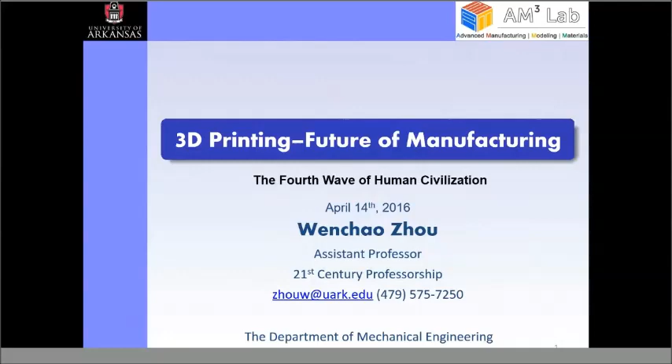So we humans have a very humble beginning, and we started from a nomadic lifestyle. We don't have any stable food source. We don't have a fixed residence. We have to hunt for food. We have to move around. And then about a few thousand years ago, we have the first wave of technology revolution, which was agriculture. And it gives us a stable food source, so that we can live at a fixed residence, so that we don't have to be nomadic anymore.

And then comes the second wave of technology revolution, about 300 years ago, the industrial revolution. Previously, we still had to use our own labor to produce, to feed ourselves. But after the industrial revolution, we have been able to use machines to do all these things for us, which freed us from labor. But there's one catch, which was that there was very little individuality. Everything had to be mass-produced, and it was produced in factories, and it was very capital-intensive. It pretty much gets out of the hands of individual human beings.

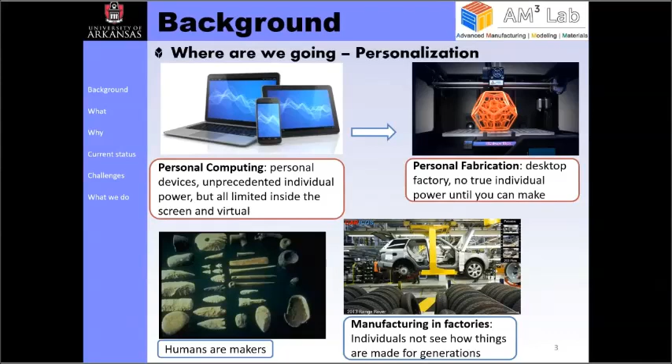So this brings up the next change that we want to make, which we can make an analogy to personal computing, which we call personal fabrication. So in this age, we envision that we're going to have factories sitting on our desk, and we can basically make anything that we can design from a computer screen. And in this way, we can truly get the individual power we want. Because we won't have any individual power unless we can make. We can really make things happen and get into the physical reality side of it.

So how do we go about personal fabrication? My answer is that it actually resides in an ancient technology called printing. And we're very familiar with printing. It was invented about 2,000 years ago in China, the woodblock printing method, which is actually the original technology that brings knowledge to the market. Afterwards, we invented movable type, and in 1951, we had the first digital printing technology, inkjet. And in 1984, we extended to one more dimension. We got a 3D printer.

Many people probably don't know printing is actually a very big industry. It's actually the biggest industry in the world. It outshines the music industry, the automotive industry, with an annual GDP of about $640 billion. And we print about 45 trillion pages every year. So if we can extend this printing to 3D, imagine what we can do if we can print 45 trillion objects every year. That would be truly the age of personal fabrication.

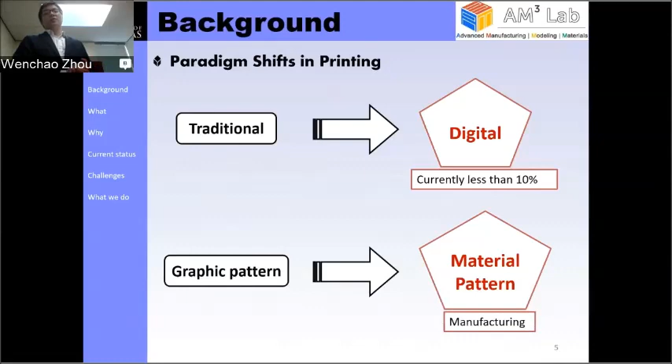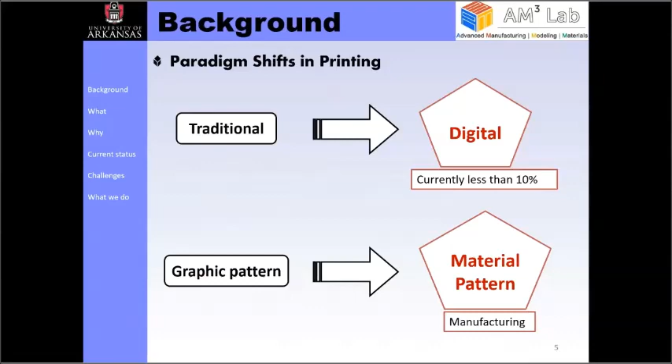So the second paradigm shift is to go from graphic patterning to material patterning, which is basically manufacturing, because manufacturing is how we pattern materials into different shapes and functionalities. So these two paradigm shifts will help us to get into the age of personal fabrication.

So what's the motivation for this paradigm shift? First of all, digital is great. Digital is what every business wants because it's on demand. It has zero waste. You don't have to stock anything. It's decentralized. You can distribute it anywhere in the world, and it's easy to store. It's green. It's easy to distribute. Easy to use. It's clean, and it has very fast turnaround.

Because one of the things that business hates is uncertainty, and digitalization can help us get rid of these uncertainties by streamlining the processes. So for material patterning, if we can digitalize information, wouldn't it be better if we actually have a digitalized world? If we can actually have a digitalized object, and 3D printing can hopefully become a tool for it. And it gives us cheaper, faster, and better products.

So this is the evolution that I see. We have the mass production from the Industrial Revolution. And we have another digital revolution which brings us the customization of information. We can customize the information you send and you receive. And if we can make the digital patterning work, the digital fabrication work, we're going to have a digital industrial revolution, which is going to give us mass customization, which means everybody is going to get customized parts at a cost that's no more than what we're currently paying.

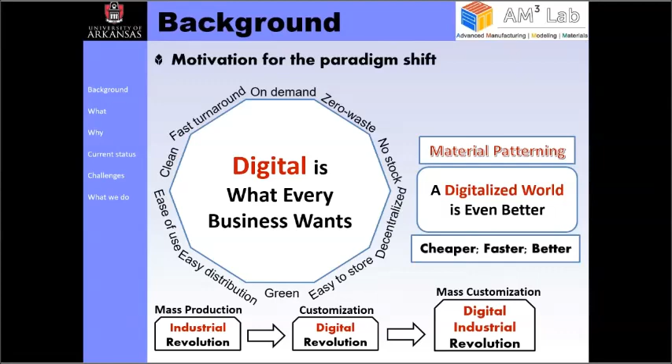So this is a map for the manufacturing technologies that we have developed over history. On the x-axis here is the relative accuracy. The y-axis is the object size. As we can see, for very large objects, we're still relying on traditional machining for manufacturing. For very small objects like the CPU you're using, or the sensors in your cell phone, all these small devices, we have invented the MEMS and NEMS technology to fabricate those.

And where additive manufacturing stands is actually in the center. It's mostly for micro and meso scale manufacturing. It's very difficult to fabricate very large objects with additive manufacturing, and it's also very difficult to fabricate very small stuff with additive manufacturing.

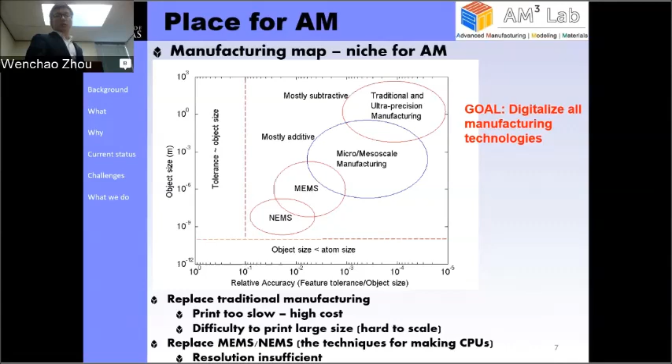So if we truly want personal fabrication, one of the first things that we need to overcome is, can we actually digitalize all these manufacturing technologies, and make it at a cost efficiency that's comparable to traditional manufacturing? Otherwise, it's going to be hard for people to accept it because of the high cost. So one of the difficulties for replacing traditional manufacturing is that all of the 3D printers right now are too slow. And we know time means money. Manufacturing time is what determines its final cost.

So that means if you want to mass produce some products with additive manufacturing, it's going to have very high cost. And it's very difficult to print very large sizes because additive manufacturing technology is very hard to scale. And if we want to replace MEMS or NEMS techniques for making CPUs, we will not only need to make them fast, we also need to improve the resolution as well. We want to get into the nanoscale.

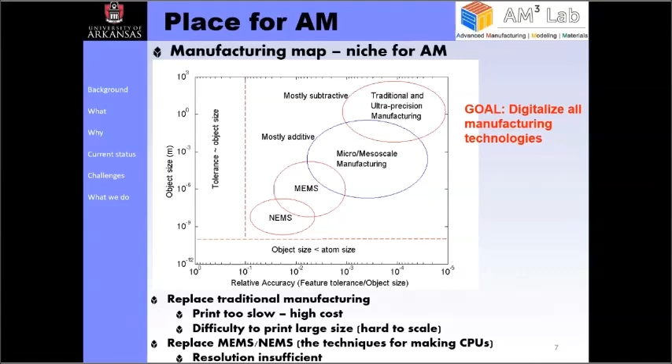So we have all these challenges that stand in the way for us to get to the age of personal fabrication. So this is why we founded the AM3 Lab at the University of Arkansas. Our primary mission here is to develop ultra-fast 3D printers so that we can decrease the manufacturing cost by increasing the printing speed. We want to be able to reduce the printing time from currently hours to minutes or even seconds, and make this fast enough so that it can compete with traditional manufacturing for mass production in terms of cost efficiency.

So the second mission of this lab is that we also want to promote the use of additive manufacturing by exploring some cutting-edge applications. We're developing some new applications on 4D printing. We're also working on some new 3D printable materials. So I'm going to briefly go over these different projects that are ongoing in our lab. Hopefully, it can inspire you to come up with similar ideas and to contribute to make personal fabrication happen in a short time.

So one of the projects that's ongoing is the inkjet printing technology. As many of you probably know, you probably own an inkjet printer on your desktop for 2D printing. And it can also be used as a very elegant 3D printing technology because it has a wide choice of materials and it's very easy to scale. It's digitally controlled. It has very fast and low cost operation. And it naturally integrates multiple materials, just like you're printing multiple colors. And it's clean. So there are two most common inkjet techniques. We call one drop on demand because you can produce a droplet anytime you want on demand.

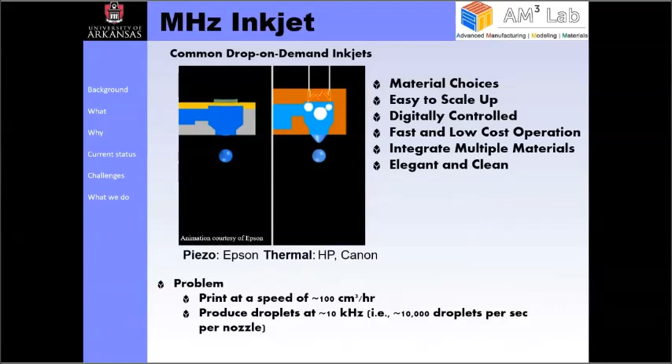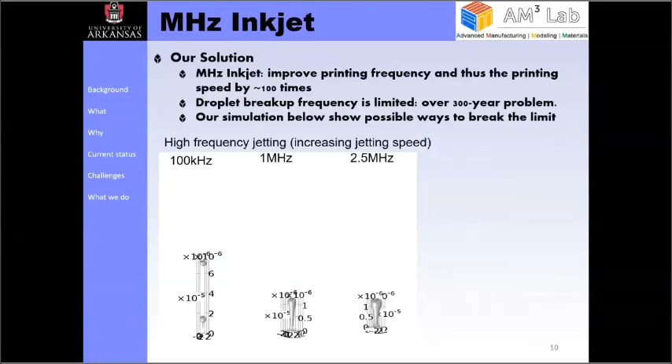It sounds like a lot, but if you do the math, you'll find the volume of droplets is not actually that good because the droplet is very small. If you think about the 600 dpi inkjet printer, the droplet size is typically around 50 microns. So that gives a very low speed. So what we want to do is to improve this printing frequency by 100 times. We want to get to a megahertz inkjet printer. If we can do megahertz compared to 10 kilohertz, we can improve the speed by about 100 times.

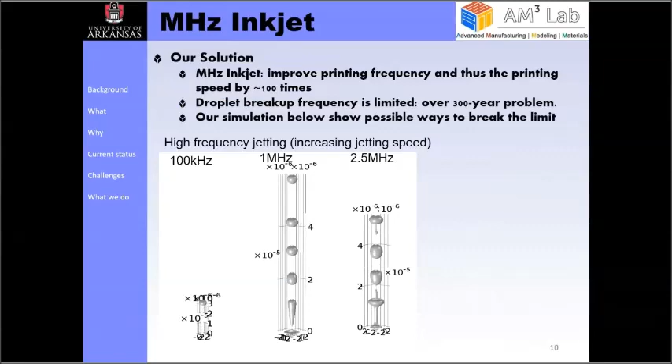And this is actually a very, very challenging problem. It's a very old problem because the fundamental physics resides in droplet breakup, which has been studied since the age of Newton. So we have come up with a hypothesis that if we increase the jetting speed, we can hopefully overcome this limit, which is limited by the surface tension force. It's very difficult to increase the surface tension force to increase the jetting frequency. So we increased the jetting speed, and we have done simulations which show we can improve the jetting frequency to megahertz for sizable droplets.

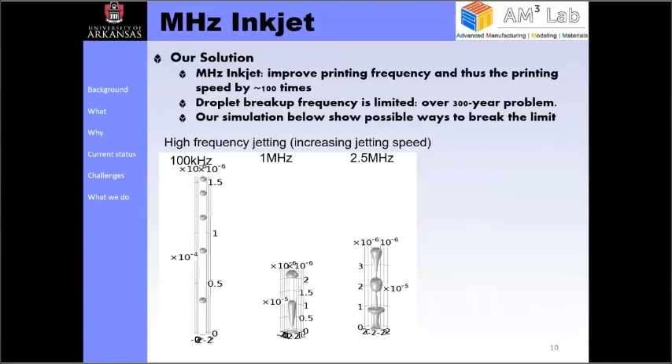Along this line, we have also studied other aspects of inkjet, and one of them is droplet deposition. When the droplets come out of a nozzle, we want to see how they evolve and form different patterns. It turns out this is very computationally expensive, and commercial software cannot simulate it. So we developed an experimentally validated numerical tool to simulate this whole process. On the left side, we show an animation of several droplets interacting together. This is actually the first time this is done. It runs about 100 times faster than commercial software, which enables us to simulate this droplet deposition process.

Along this line, if we want to produce a super fast inkjet printer, we also need to work on the inkjet print system, which we have started working on. One motivation for this project is that current 3D inkjet printers are very costly; it costs over $100,000 to buy any of the 3D inkjet printers on the market. So we want to build a low-cost solution. This is a printing system we have developed: we disassembled an Epson inkjet printer and use its print head to print, and we constructed XYZ stages so it can become a 3D printer. The whole system is not finished yet, but hopefully we'll get it done in the next couple of years.

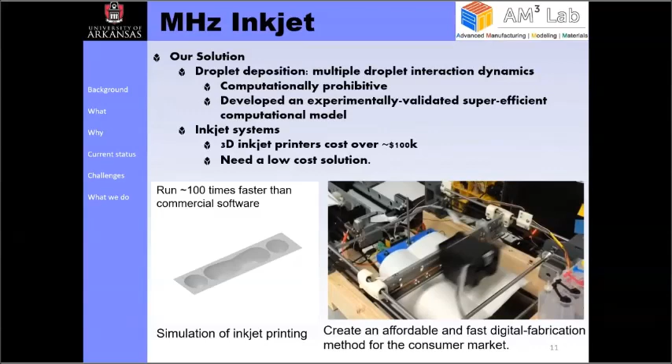A different process we're working on to improve speed is selective laser melting. If you are familiar with this process, it uses a laser to scan over a powder bed, like in this animation, to melt the powder particles, join them together, and build up layer by layer. The problems with this process are that the laser is too expensive and hard to maintain, the laser is energy inefficient, and, our point, it's slow because it's a point-by-point scanning process. It's very difficult to speed it up.

I cannot talk too much about our current solution in detail because everything is still at a very early stage, but I will briefly give you an idea of what we're doing. We're developing an inkjet-like print head which is scalable, using multiple nozzles instead of one single point, so you can print a whole layer at one time. Based on our calculations, it's about 100 times more energy efficient than laser. And because it's scalable, we can hopefully scale it to a very high speed.

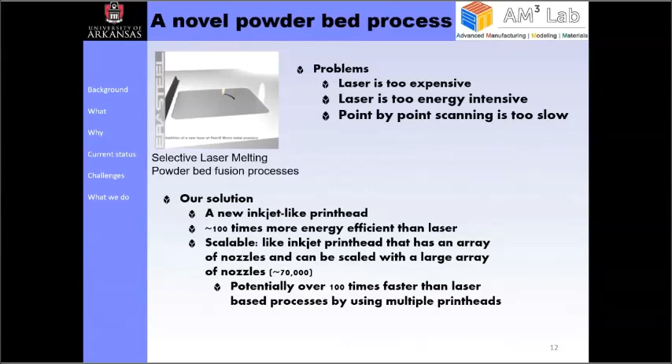So this is some of the results that we have gotten in developing this print head and to make this process happen. It's a MEMS device just like an inkjet print head, and it's multiple layers, and this is the print head design, and this is the design of our packaging. The center chip is the print head that we're developing, and this is the silicon wafer that we use to fabricate a print head. On this silicon wafer, we have 16 different print heads on it.

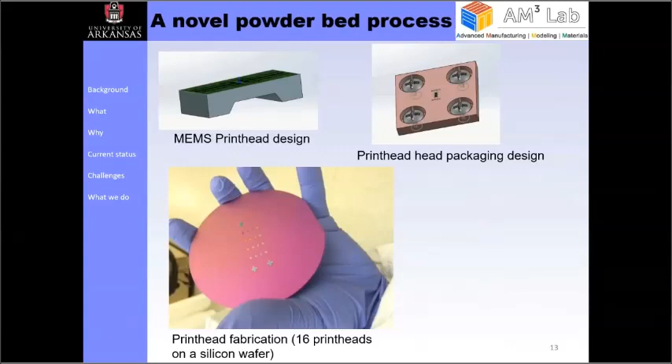So again, everything is still in a very early stage, and hopefully we'll be able to talk more about it in the near future. So another different problem for this selective laser melting process is the powder feeding process. And you have this wiper that wipes across this powder bed to spread a layer of powders. And it's actually a very slow process because the wiper needs to accelerate and wipe and then decelerate and stop and then change direction and do it again. So it takes about a second to spread one layer. And if you are going to do thousands of layers, it's going to be hours.

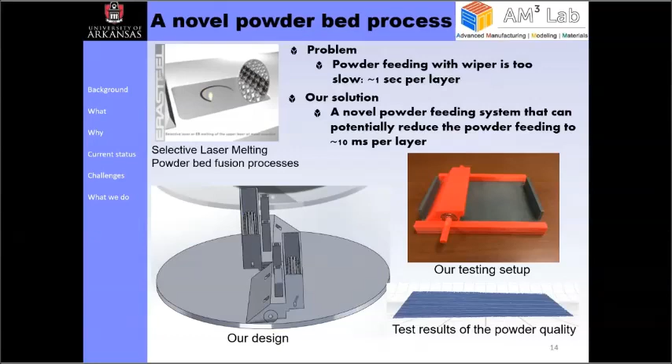So our solution is that we are developing a new powder feeding system that can potentially reduce the powder feeding time. And this is a design of our powder feeding system, and we have built a test setup to test the spreading quality of this design, and this is some test results. And also because our lab is fairly new, everything is still in a very early stage.

So one of the things we want to do for these different processes is that we actually need a lot of MEMS devices, the micro devices for the print head. Say, for example, the inkjet print head is a MEMS device. For this new process that we're developing, the print head is also a MEMS device. So we're thinking, we're a manufacturing lab. Why do we have to rely on a clean room to do this? So this is why we're developing this nano printer. We want to be able to have a self-sufficient lab, so that we can just print these devices that we need with more flexibility and low cost. So this is another printer that is designed to achieve sub-micron resolution.

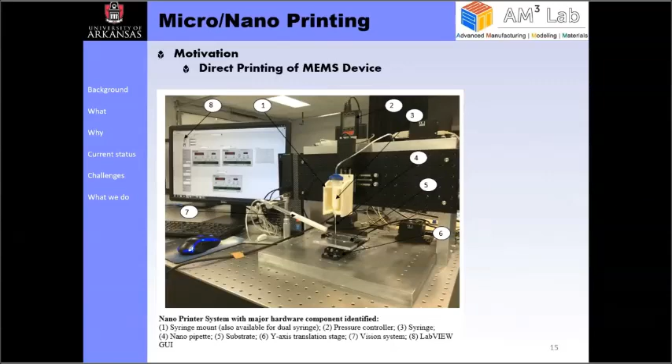And it sits on an optical table to isolate the vibration, with very high precision motion stages and a nozzle size of about 100 nanometers. And we have also developed software, which you can see on the computer screen, to control this printer so that you can input an STL file and print three-dimensional features with it. This project is 70% finished, and we're still working on it to perfect it. And this is some test printing results that we get.

We're still having some issues getting the printing line width to conform with the nozzle size. This is a print test of a line with a 10 micron nozzle tip. As you can see, we get about 80 micron line width, which is still not ideal because of some issues that we're experiencing. But one thing that we do get is the thickness. The thickness of a printed line is about 200 nanometers, which we printed using silicone. And the surface roughness of the silicone is about 40 nanometers. We did an AFM scan. I forgot to include a picture here.

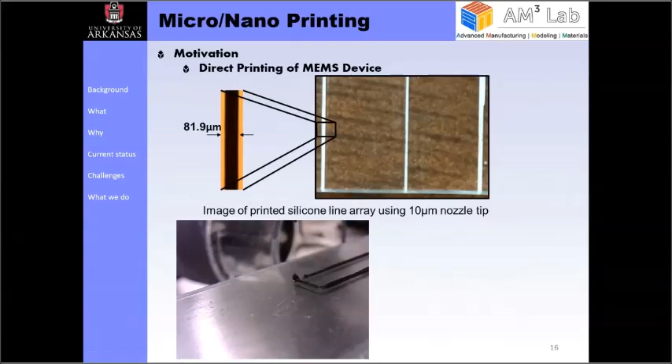But these are some promising results we have gotten from this nano printer, which can hopefully help us to produce some nano features. And this is an animation of how this nano printer is working. And as you can see here, there are still some issues we're trying to figure out. So that was our mission of developing the 3D printers. And we're also exploring some of the new applications for additive manufacturing.

And one of the exciting fields is 4D printing. And 4D printing is basically 3D printing plus smart materials. Smart materials are materials that can respond to external stimulus. Say, for example, if you change the temperature, the materials can change their shape. And you immerse some in water and they can change their shape. So by knowing how the material is going to respond to the external stimulus, we can design a structure that can respond to external stimulus. We can basically program the structures beforehand, before we print them. So this is what's known as 4D printing. The additional dimension is time.

So on the left-hand side are some research results from the MIT lab. They have printed a hydroactive polymer which, if you immerse it in water, slowly grows into a pattern that shows MIT. And so we want to continue working in this direction because we see a lot of potential. One of the things that we want to work on is

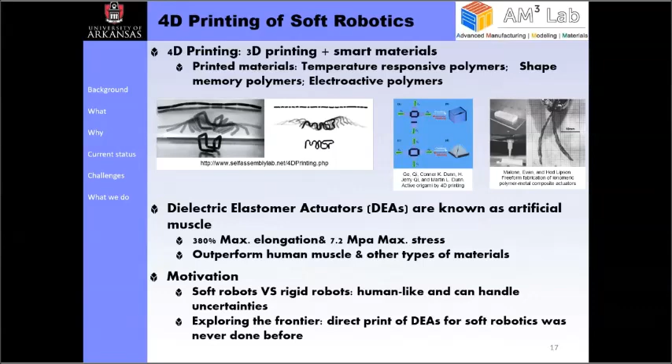And the strain energy that it has is about 100 times more than human muscles. So that means, if you print a soft robot with this material, you can hopefully get 100 times stronger than humans. And this is why this material is called artificial muscles. It has never been studied to be 3D printed. So this is actually one of the focuses that we're working on. As you can see, the motivation is that we want to explore the frontier so that in the future we can directly print soft robotics.

So one of the things that we got started on is to print some kind of actuator. This material behaves like this. You have two electrodes on two sides, and you have this dielectric elastomer, which is a thin film, a membrane, sandwiched in the middle. When you apply voltage to the electrodes, there's going to be electrostatic force attracting the two electrodes on the two sides, and this force will compress the membrane in the middle, and this membrane will expand. It will be compressed in the Z direction, the thickness direction, but it will expand in the XY direction. So this is where you get the actuation.

So these are some of the samples that we have printed. This is a circular shape dielectric elastomer actuator, and this black thing in the center is the electrode. This gray membrane is the dielectric elastomer. We have also developed a different configuration. So this is a test of the actuation. You can see when you apply voltage, the edge is deforming on this side. So we can design different configurations so this can become a linear actuator. When you have a linear actuator, you can get into more complex motions.

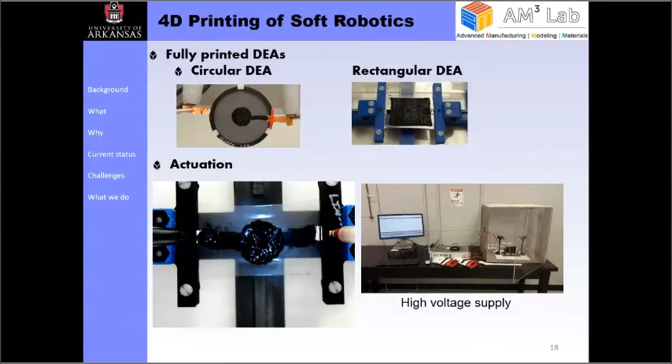Another project that we're working on is to develop a new 3D printable material. We're working with a local company on this magic material. This material is transparent. It feels like human flesh, and its hardness can be adjusted by changing the recipe. But right now, it's mostly produced using hard molds. It's a thermoplastic. So we're developing printers that can print this material. If this material can be made 3D printable, it's going to have huge applications in multiple fields, such as the medical field. There's huge attention on how to get flexible materials 3D printed, and hopefully this is going to be one of the interesting projects to the whole 3D printing community.

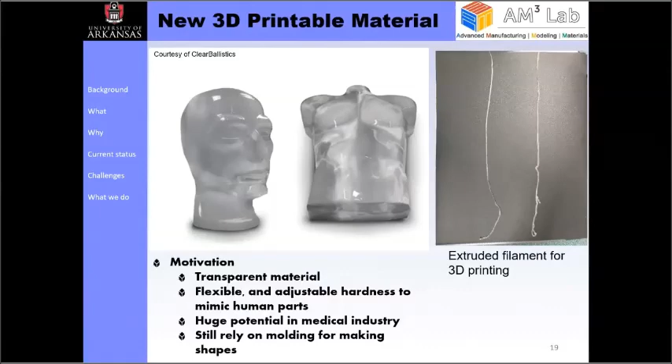So this is pretty much what's going on in our lab, and I would be happy to take any questions if you have any. All right, how close are you to getting that human flesh material printed? How long do you think until we can expect to see that? It's very close, hopefully in the next few months. That'd be very nice. Do you think you can get that to market, or would that be something the universities could collaborate together on? Yeah, that's actually one of the plans. We hope to commercialize this if everything goes well.

Excellent, excellent. I was designing a human hand that could use a flesh material on it, so I'm very interested. Thanks. Yeah, if you're interested and you get some time, you can come visit the lab to touch the hand.